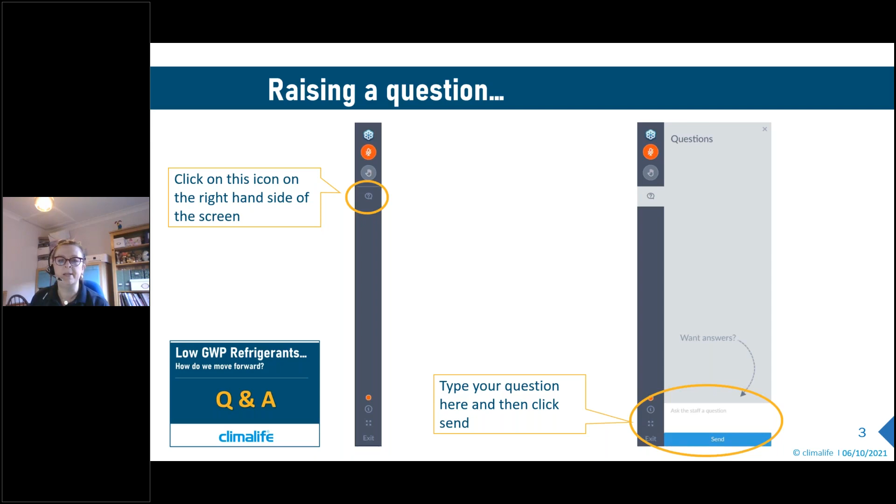So now it's time to hand you across to our Senior Technical Sales Manager, Neil Roberts. Good morning, Neil. Good morning, Mel. Thank you. Good morning, everyone. Well, Mel skipped over the agenda, so I'll just go back. Sorry, Neil. That's all right, no problem.

Okay, so it's great to have everyone on the call. It's great to see so many people interested. And as Mel said, we'll try and incorporate some of the questions which you gave us when you were registering. The agenda is pretty simple, just 3 points, but it's a huge subject area, and we're really only going to be scratching the surface this morning. So if there's anything else you want, you can watch it again on the recording, or you can contact us directly, of course.

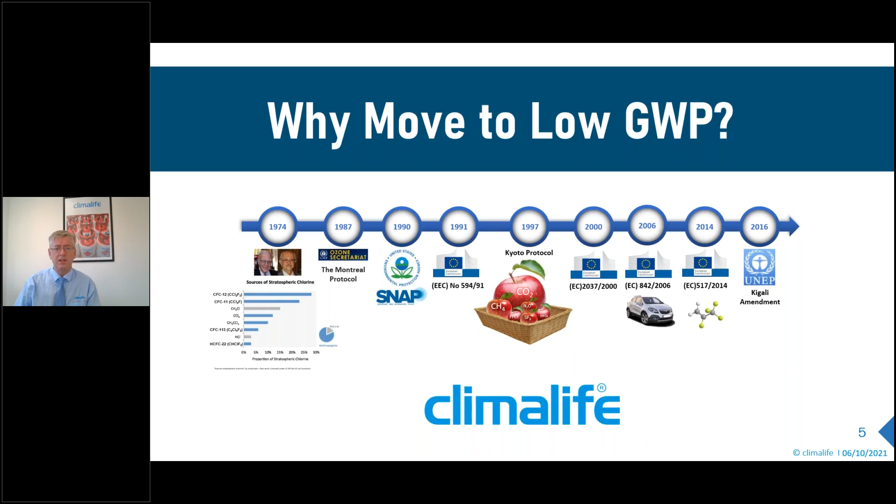And we have our first audience question, which was submitted during the registration. When is the 2,500 GWP limit going to be decreased for stationary systems and condensing units? And what will it be? Well, we'd all like to know that, quite honestly. Right now, the review process is going on in the UK and in Europe. And that process is indicating that there's going to be changes with things like this, but we don't know what they are yet. The EU have indicated that the first proposals will not be seen until the spring of next year, so we really have to wait until then. But I think it's a reasonable assumption to think that this is going to happen.

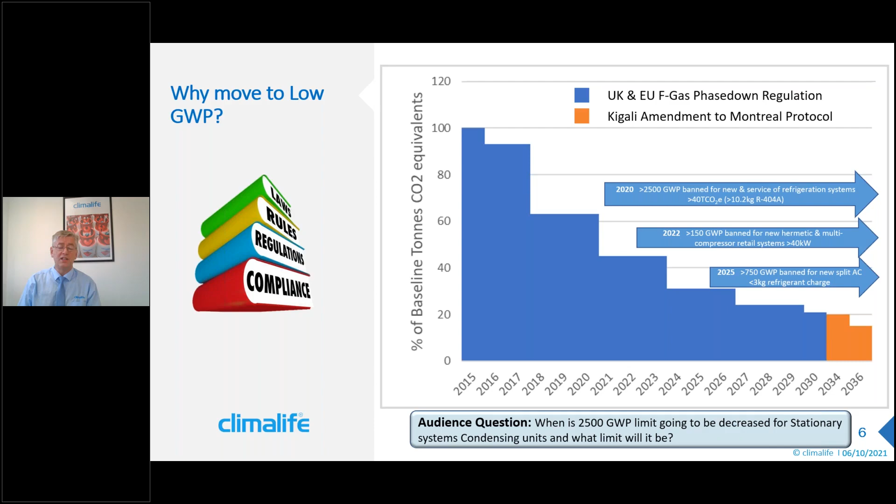So we're currently 2021, nearly into 2022, and we're around that 900. We should be around that 900 average. So anything significantly above that is obviously at risk at some point when the quota starts to bite.

And remembering this is an average. It doesn't have to be 300 or below, as long as the average, so we can use some higher GWP products, as long as there are other ones to offset it. But what can be said for sure is it's very unlikely anything with a high GWP will be sustainable in any large quantities going forward, because that would just take the average above there and we won't have enough quota.

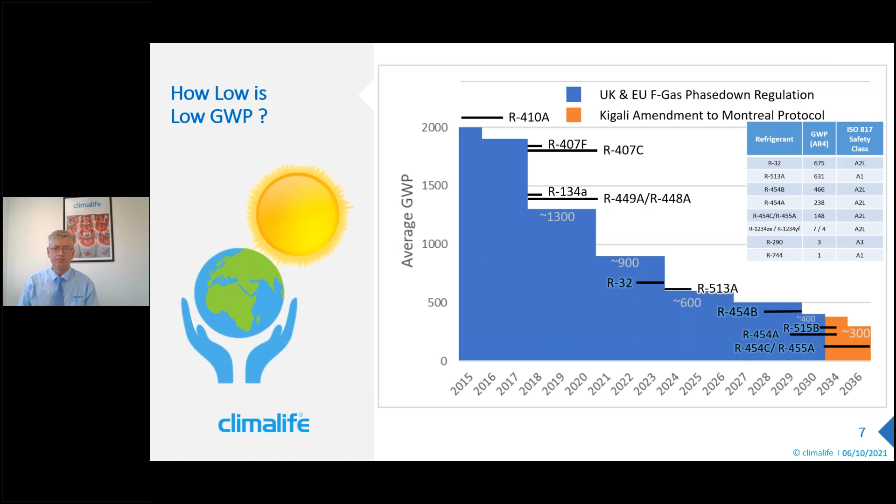So we have another audience question at this point. Are there any low GWP refrigerants which are non-flammable? Will A2L refrigerants become the trend for future refrigerants? Well, you can already see on the table there's carbon dioxide. That's a non-flammable low GWP refrigerant, but there are a few others. 515B, for example, is a non-flammable refrigerant. It's a 134A type refrigerant, and we'll talk about that a little bit later as well.

We've also got the low pressure refrigerants, 1336, 1233ZD, and maybe a few others which come along for very specialist niche applications. But these are really for low pressure systems. You may have seen just this morning on one of the media outlets, 1233ZD is being looked at for a high temperature heat pump system. So this is the type of thing where these products are going to be used. The mainstream refrigeration and air conditioning are going to be using the other products, which tend to be A2L.

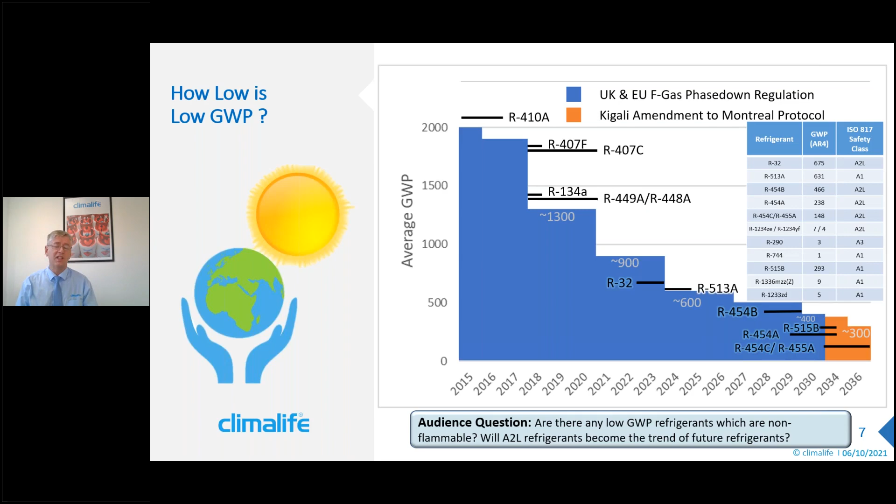And you might say, well, with the prices on this current trajectory, why should we bother to change? And the reason, of course, is the phase down. We're already probably not up to where we are with the phase down. I would challenge anyone out there using refrigerants to take stock of the refrigerants you use and work out what the average GWP of them is. If it's well above 900, you need to be looking at how you can change that, because at some point that quota will bite and we'll be back in that situation we were in 2017-18 with the higher GWP products.

Again, another audience question. With UK quota restrictions close to biting, why have many users seemingly stopped work on low GWP options? Well, one of the reasons is what you're looking at now. The prices have come down. It would appear on the face of it that there's maybe not a problem out there, but this is very much a false sense of security. And at some point, we will see that bite of the quota, and we will see the rise in price like we did in 2017 again.

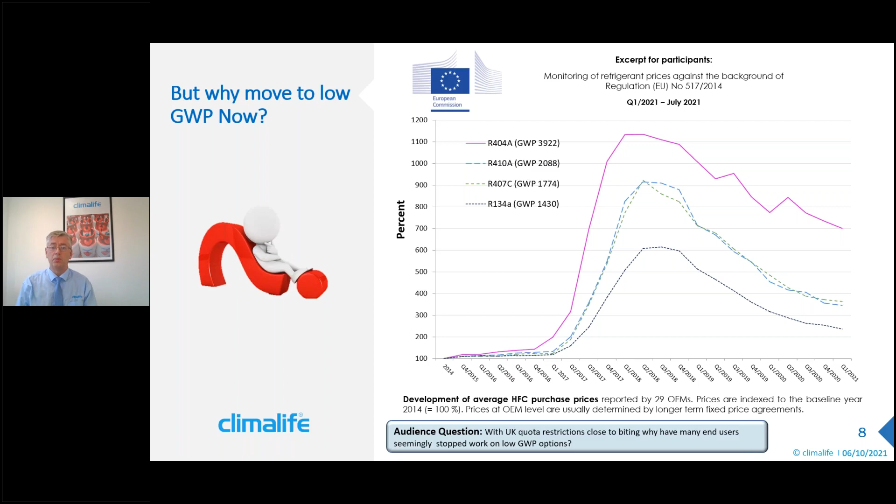So you can carry on using the products that you're using today, higher GWP products, but they're not sustainable going into the future. We had the perfect storm of COVID and Brexit as well happening in the UK. So all these things had an impact. So hopefully, very soon, that will now turn around and people will start to move again.

So that's all very well. We still haven't addressed why people should move to low GWP now. We've looked at the reasons why they haven't, but why should they? Well, I'm sure many of you played this game in the past, Top Trumps, certainly I did. So let's do a bit of refrigerant Top Trumps.

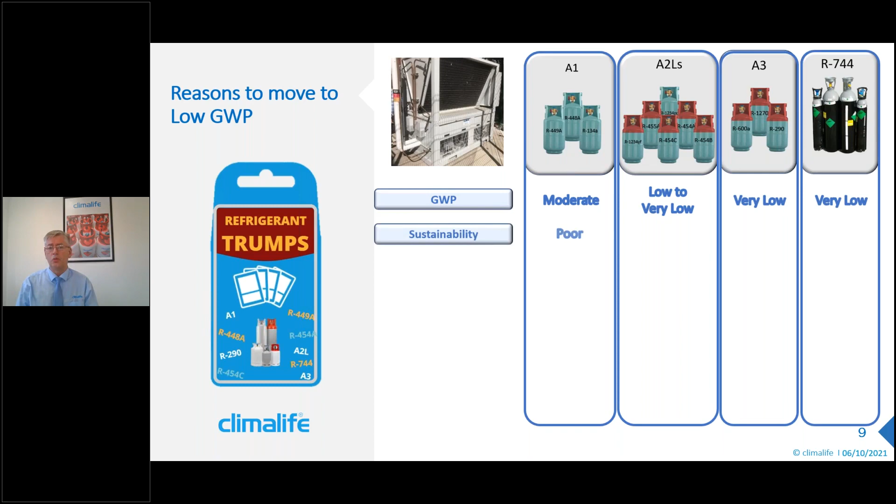Looking at the various parameters here, so global warming potential, obviously the replacements are low to very low. That's a necessity of the phase down. You need sustainability. If it's a higher GWP, if it's well above those average GWPs, then sustainability and price stability is going to be poor.

Energy efficiency is really important. Going forward, that translates into emissions, that translates into running costs, so it's really important to get good energy efficiency from your systems. And when we look across the line there, you can see I've put for A3s moderate. I'm not talking about individual systems. I'm talking about larger condensing unit systems where you probably need to use a secondary system, and that impacts on

energy efficiency. And CO2, that generally, fundamentally has a poor energy efficiency. You can do things to the design to improve the energy efficiency, but fundamentally, thermodynamically, it has a poor energy efficiency. Refrigerant charge is obviously an issue when we come to things like flammable refrigerants, and we'll cover that in more detail as we go through.

And total cost of ownership. A lot of the time, everyone is looking at the cost of installation, how much it's going to cost me to put this system in, and ignore the fact that that system may be cheap to put in, but it may cost you a lot of money over the lifetime of that system. So it's really important we try, as an industry, to look more at total cost of ownership rather than just cost of installation. It's a much better indicator of value for money.

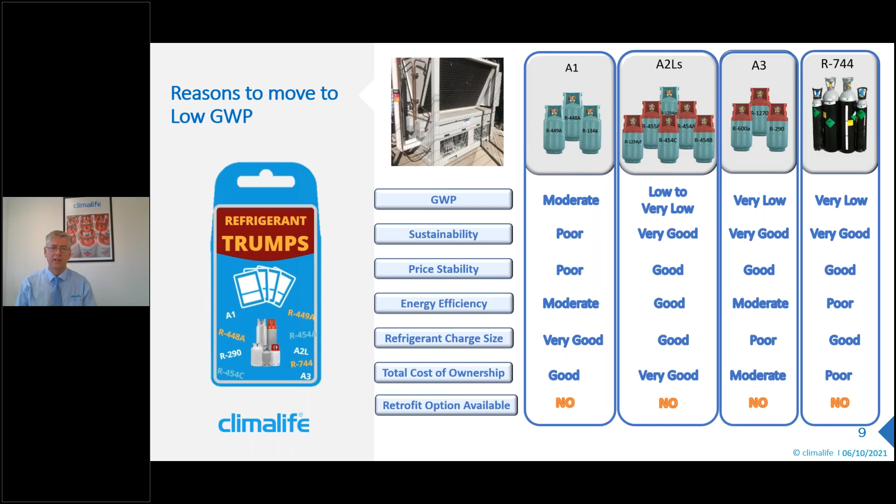Going forward, if you're putting in a 448A, 449A system today, and you want it to see through its lifetime, what are you going to do when the phase down bites, and it's either very expensive or very difficult to get hold of those products because there is no retrofit option? And this is really important. So any system you're putting in today, you want to see it through to its normal lifetime, then you need to put in a refrigerant which has sustainability and will take it through to the end of that lifetime. And that will not be current moderate GWP products.

So let's take a look at which products you might be able to use in which application. This is a very quick overview of where we are on this. So starting with self-contained or plug-in hermetic systems. And for the purpose of this, hermetic means all permanent joints in the system. So there are some standards and regulations applying to this. From an F-gas point of view, from the 1st of January next year, all refrigerants in new equipment will have to be less than 150 GWP in this type of equipment.

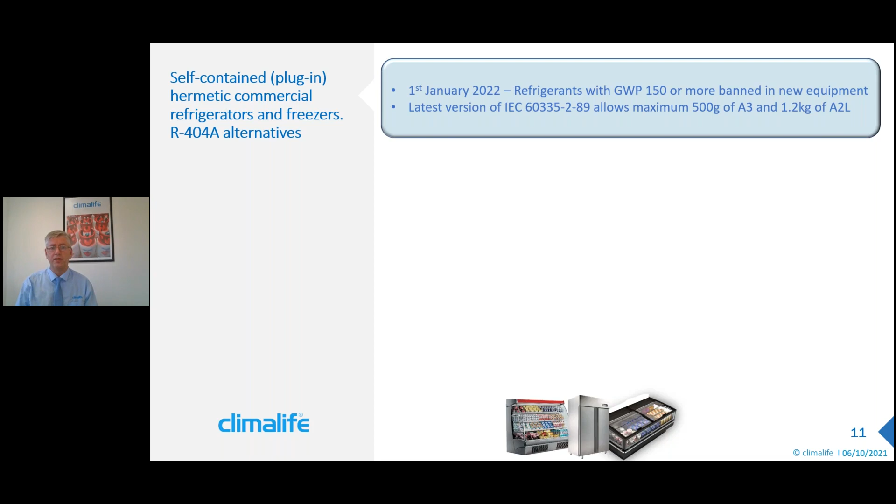And in terms of standards, the latest version of IEC 60335-2-89 allows a maximum of 500 grams of A3 refrigerant or 1.2 kilograms of A2L refrigerant. Now, it's difficult to compare these. They're going in lots of different types of equipment. So what I've done is taken some theoretical cycle calculations using the RefProp software, and you can see the conditions which have been used there to do the calculation.

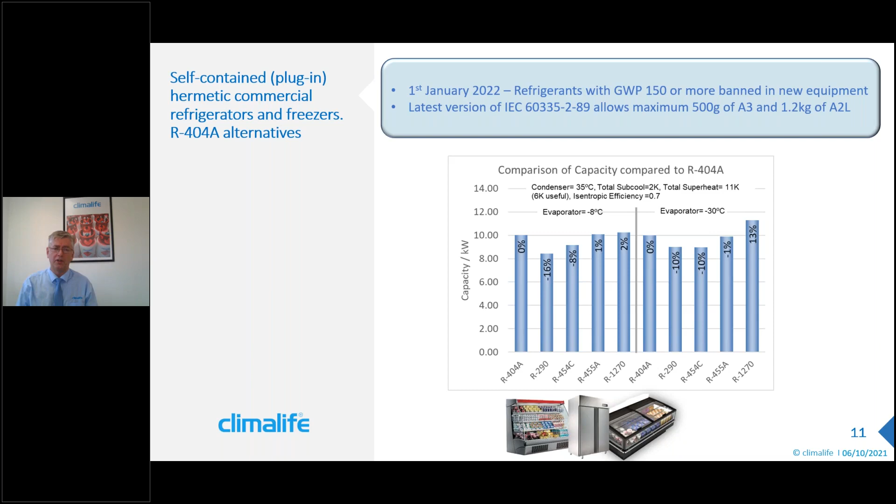Here's a capacity calculation, gives you an idea of the relative capacities. Because we're talking new equipment here, it doesn't really matter that it's a lower capacity refrigerant like propane, for example, compared to 404A, because you can use a bigger compressor. You can design for that capacity load. So the capacity difference is just there to show you how they compare to each other, but it's not going to be an issue, although there may be some limitations in this type of equipment. For example, space can be at a premium, so a much larger compressor could be an issue. But certainly for the examples given here, none of these would be a problem.

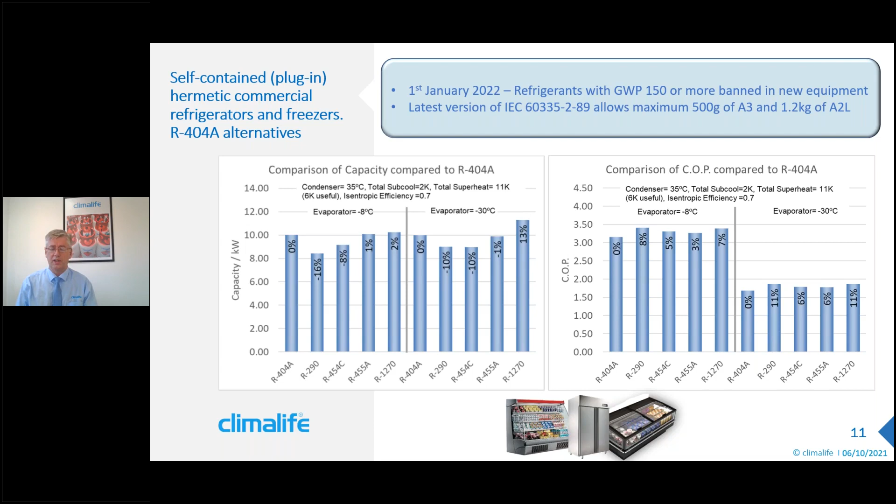But what's really important, as I said earlier, is energy efficiency. So when we look at the COP of these refrigerants, we can see they're all better than 404A, which is what may have been used in the past. And we can see here why, in many cases for this type of equipment, hydrocarbons are used, because they are showing the highest energy efficiency, both at medium and low temperature, whether it be propane or propylene. But the other low GWP options, 454C and 455A, both show energy efficiency gains over 404A as well. So they're both good options in any situations where the A3 flammable refrigerants may not be accepted.

So also, some of the systems may have used 134A in the past. For domestic applications, isobutane was used in these applications, but in many commercial applications, as you can see on the chart, it's a very low capacity compared to 134A, and the extra size in the compressor is going to be difficult. As I said, size is often a premium in this type of application.

We can also see that there are other A2Ls. We have 1234ZE. That has a lower capacity than 134A, but as I said, in new equipment you can use a larger compressor, and that is also a possibility. But many of these systems, again, have gone to propane in medium temperature and low temperature.

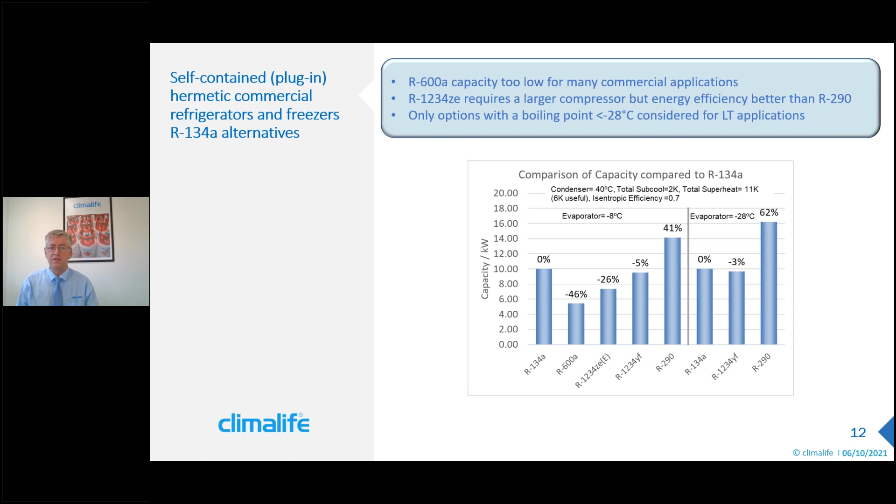When we look at the COPs, the energy efficiency, maybe a surprise to some people, we'll see isobutane certainly had a higher energy efficiency than 134A, but as we already said, it's not really used in commercial equipment because of the much lower capacity. But 1234ZE actually has an equivalent energy efficiency to 134A, and actually better than propane.

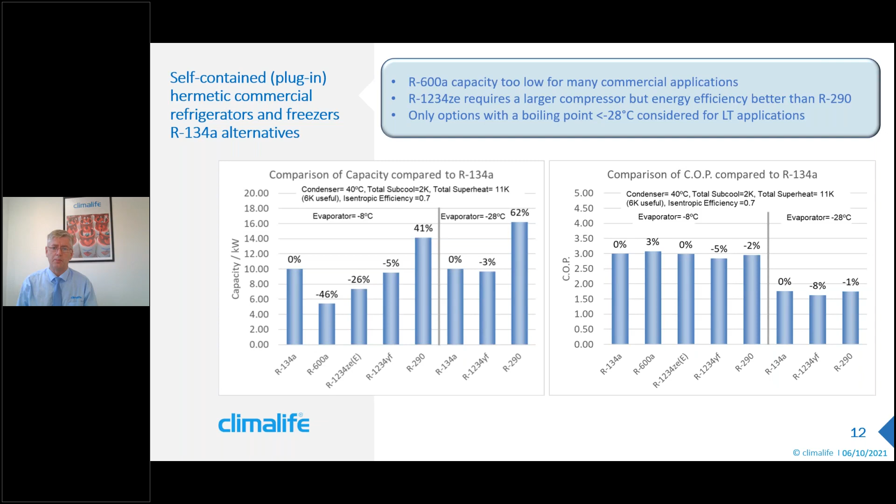So 1234ZE may be an option for medium temperature. It's not really an option for low temperature. The boiling point means we'll be going into a vacuum to operate in low temperature applications. So for that, certainly propane is looking like a good option.

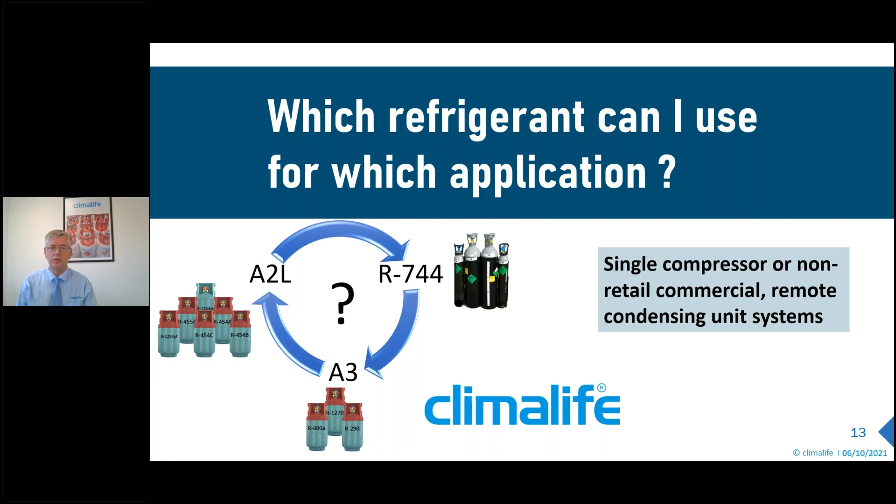So moving on to single compressor non-retail commercial, and I emphasize non-retail because there are different rules for retail, which we'll get onto very shortly. Standards and regulations. F-gas again, of course. As far as this application is concerned, at the moment it's just a 2,500 limit, and that's been in place since January 2020.

We also have EN378 coming into play with this type of equipment, so charge restrictions will apply depending on the safety class and many other aspects, and we'll look into that in a moment. And also we have the pressure equipment regulation, PED, which again has to be taken into account, but PED applies to all refrigeration systems. It has done since 2015, but with the flammable element, there may be some more rigorous checks or certifications or even engineer qualifications which are required.

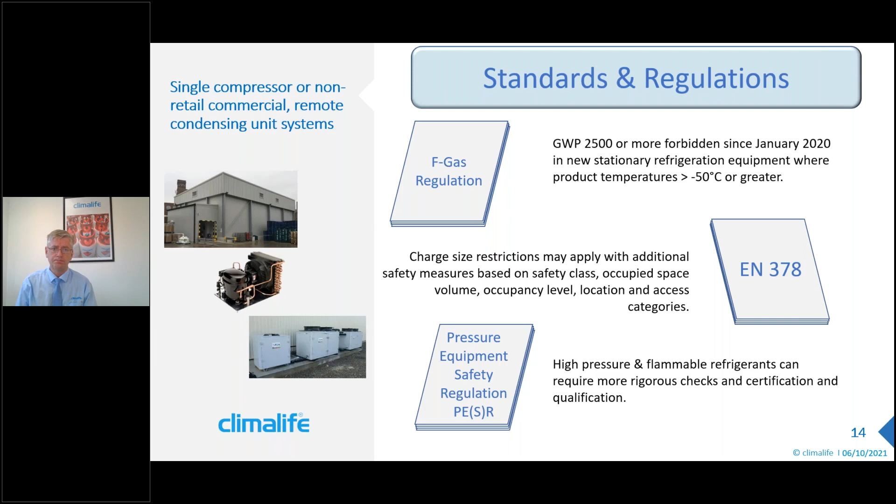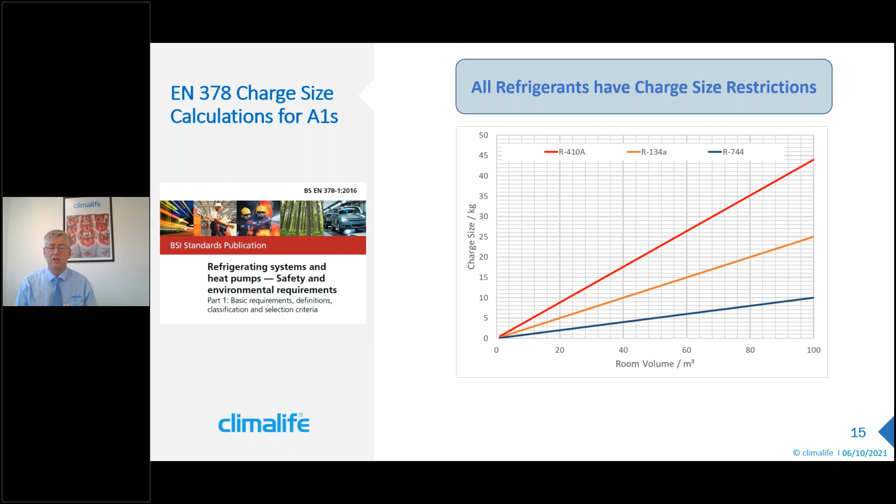So EN378, as I said, applies to all refrigerants, not just A2Ls or any flammables. And some people may be surprised to learn, it's quite often overlooked, that all refrigerants do have charge size restrictions. You can see here on this chart, we have 3 A1 refrigerants, 410A, 134A, and carbon dioxide. And you can see there's quite a big range already in the charge size restrictions allowed under EN378. So it doesn't just apply to A2Ls, it's just with the flammability, quite often the charge restrictions are a little more severe in some cases.

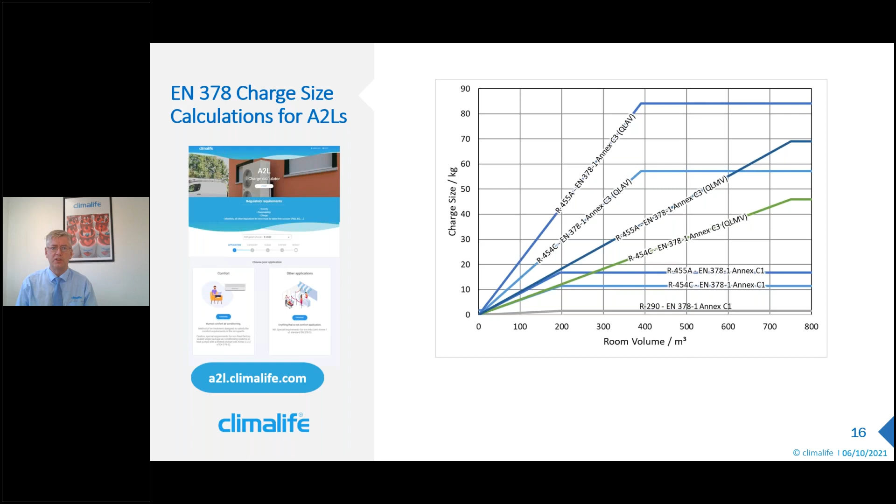But then for systems where the refrigeration system is outside, so a typical condensing unit, you can go up to much higher levels, and with some additional protective measures, depending on the refrigerant, you can go right up to 84 kilograms of refrigerant as well. So there's a big range of potential charge sizes which can be used depending on the conditions. And I'm not going to go into the details of EN378 today. If anyone wants to do that, you can by all means contact me at a later date.

Another audience question. What safety measures are required for a small store with a refrigeration load of approximately 15 kilowatts with a floor area of 160 square meters? Well, first thing I would say is EN378 for refrigeration works on room volume. So the floor area and the amount of refrigerant allowed will depend on the ceiling height. I've got 2 examples here. I've got on the chart a 3-meter ceiling and a 4-meter ceiling. Where that line crosses the various lines for the different refrigerants, that will be the maximum charge quantity which can be used.

And you can see in the top case, with 455A you can use 84 kilograms, so that's the maximum you'd be able to use there, and around 57 kilograms with 454C, which would easily cover a 15 kilowatt system of this size. It would be well below those levels. In fact, probably well below the QLAV levels on there.

I've put carbon dioxide on there as well, because although it's an A1, as I said earlier, there are still charge size restrictions, so they have to be taken into account even with carbon dioxide.

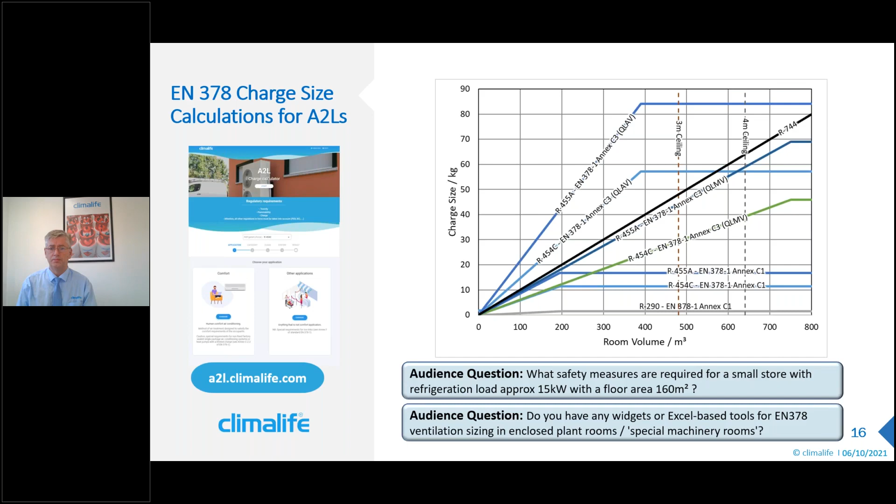Another question: do we have any widgets or Excel-based tools for EN378 ventilation sizing in enclosed plant rooms, special machinery rooms? Unfortunately, we don't have ventilation calculations. We do have, as you can see on the left-hand side of the chart, a web-based EN378 charge size calculator. We call it an A2L charge size calculator, but all the refrigerants are in there, basically all the A1s. You can do the charge size calculations for just about any refrigerant using that. If you need any help on that, by all means contact us and we can help you. Maybe the ventilation one is something we should look at in the future.

The next thing to take into consideration when moving from an A1 to an A2L or A3 refrigerant is, of course, the Pressure Equipment Regulation. Under this, the A1 refrigerants have been in fluid group 2, but the A2Ls, with the exception of 1234ze, and the A3s are all in fluid group 1. And this has quite a big effect in terms of which category the system may fall into, and it will change categories at much lower volume. The table there is for a vessel on the high pressure side. You can see where it changes.

If we take an example, a system with a 10-liter liquid receiver on the high pressure side with 404A or 449A, that would be category 2. But with 454A, 454C, 455A, and carbon dioxide, that would move up to category 3. With 1234yf, if you went to a lower pressure A2L, then that would remain at category 2. And if you used 1234ze or 515B, then that would actually go down to category 1 because of the lower pressure, and also they're considered group 2 refrigerants under PED.

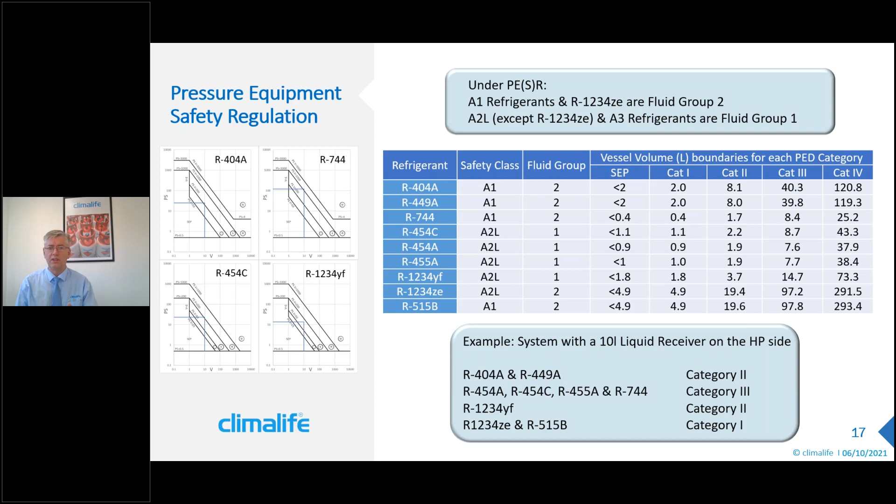So you can see there's a big difference there, and this is one of the main reasons why you won't be able to use an A2L in an A1 system as a retrofit option, because making this change of category on a system in place is going to be very, very difficult to say the least.

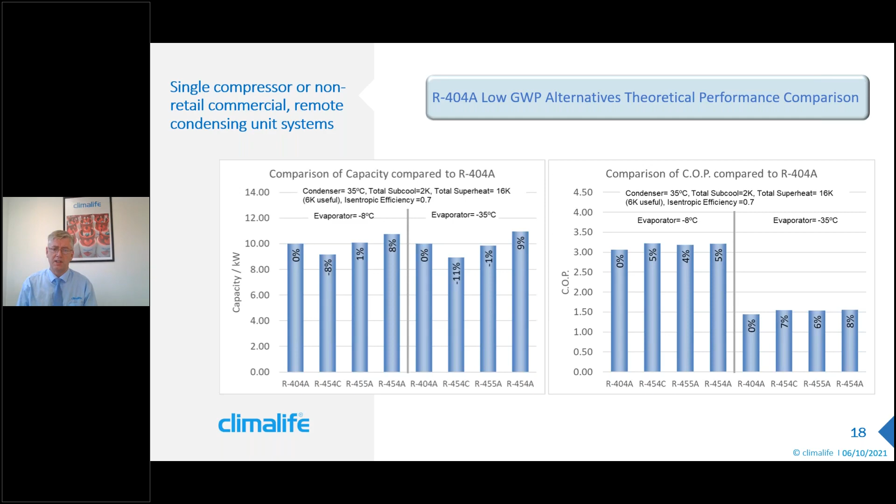To compare it with carbon dioxide, it's quite a tricky one because obviously the technology is quite different, the systems are quite different. But what I've done is, again, some theoretical calculations based on a simple carbon dioxide booster system with 4 kilowatts low temperature and 10 kilowatts medium temperature, comparing that to two individual systems with an A2L refrigerant at medium temperature and low temperature.

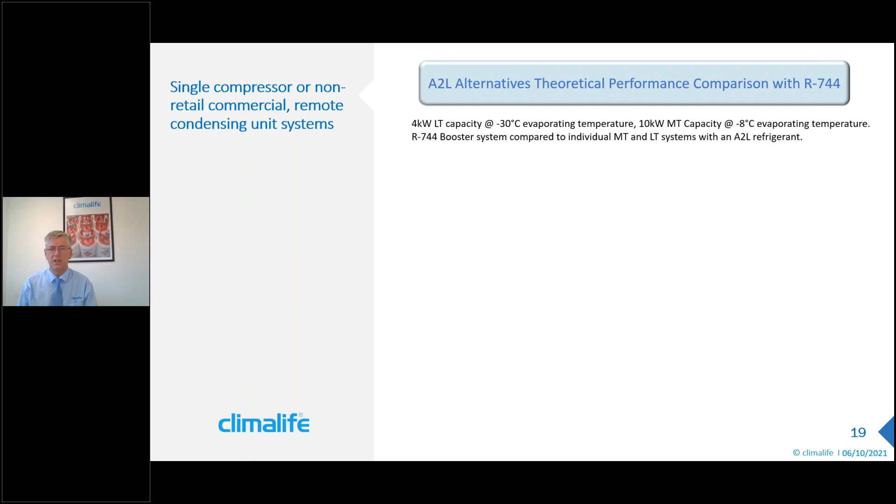At the design condition, you can see there's a very significant difference in the COP, the energy efficiency. And this is even using the same compressor isentropic efficiencies for both the carbon dioxide and the A2Ls, which is not normally the case. Normally, you would see a drop-off in isentropic efficiency in the CO2 system, but I've applied the same to both. So that's the design condition.

If we look at a more typical operating condition, especially for the UK, 15 degrees ambient, then we can see, although the carbon dioxide system COP has gone up, the other refrigerants have gone up as well to a greater extent.

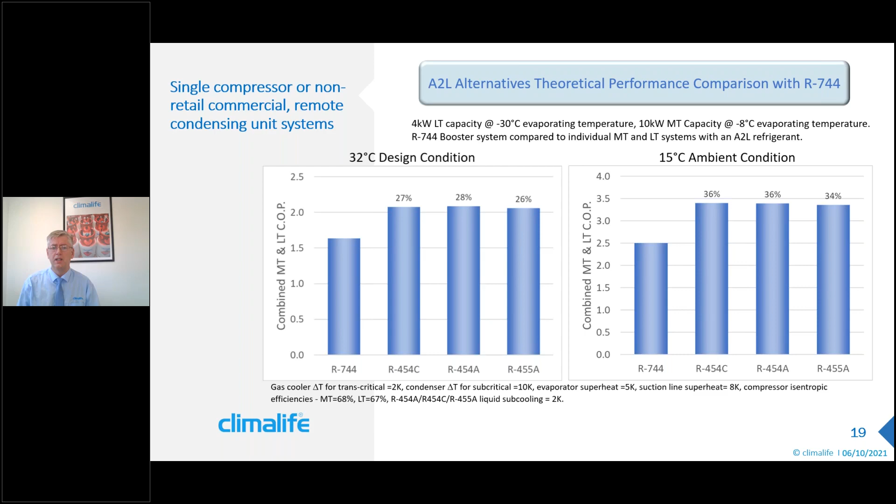So we're actually seeing that gap widen between them. So you can see in any situation where you're looking at a low GWP option, you need to evaluate what refrigerants you can use, how they perform, and how this obviously translates into energy efficiency, which, as I said earlier, translates into emissions, but it also translates into running costs as well. So it's really important to do these to make sure you don't just base any decisions on refrigerant GWP.

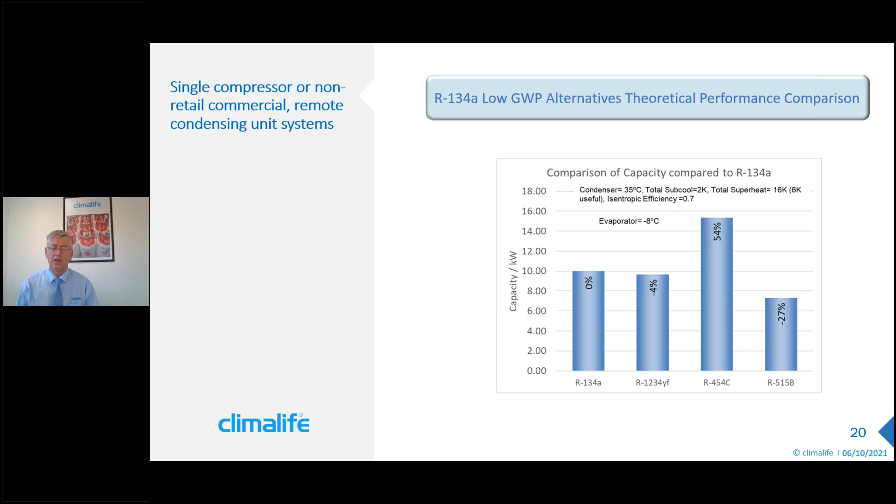There may be some people out there using 134A type condensing systems. In this case, we have some other options. 1234YF is an option. 1234ZE is also an option, but I've included 515B, which has a very, very similar performance to ZE, but it's A1 classified. So although you would need a larger compressor to get the capacity at medium temp conditions, you have got the A1 possibility with that.

And we look at the energy efficiencies, and you can see that they're all very close, the 1234YF, and I put 454C in there. That may be an option. It's got a much higher capacity, obviously, but it may be an option worth considering, although the efficiency is slightly lower than 134A, whereas the 515B has an equivalent efficiency to 134A.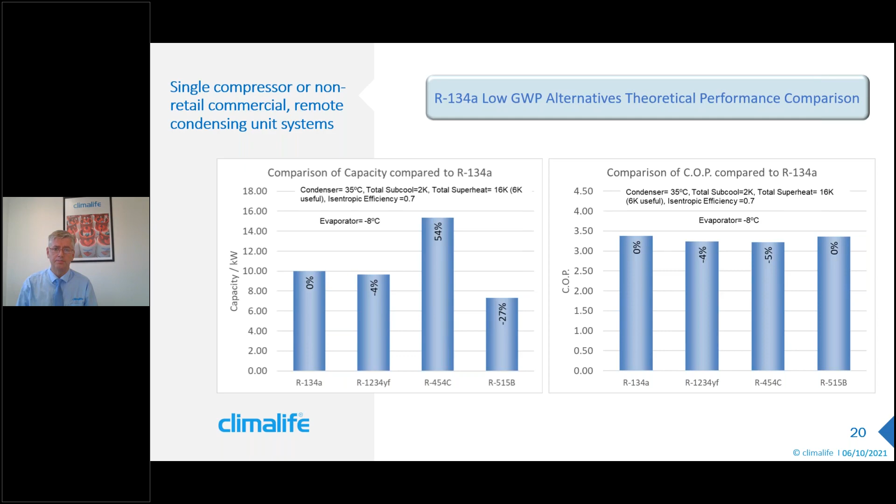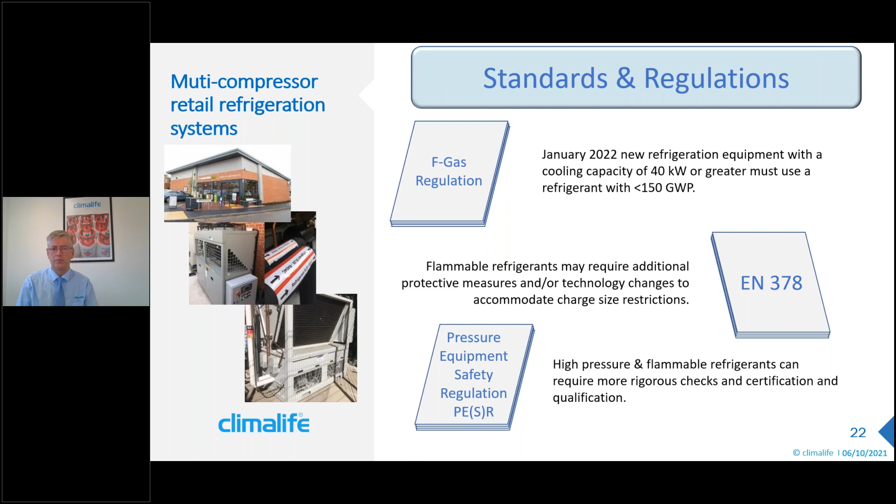Multi-compressor retail refrigeration systems. So under the F-gas, as of January the 1st next year, so just a couple of months away now, new refrigeration equipment with a cooling capacity of 40 kilowatts or greater must use a refrigerant with a GWP less than 150. So this is going to be a big change for that application, obviously. The EN378, as with the condensing units, also applies, and of course pressure equipment regulation also applies in this application as well.

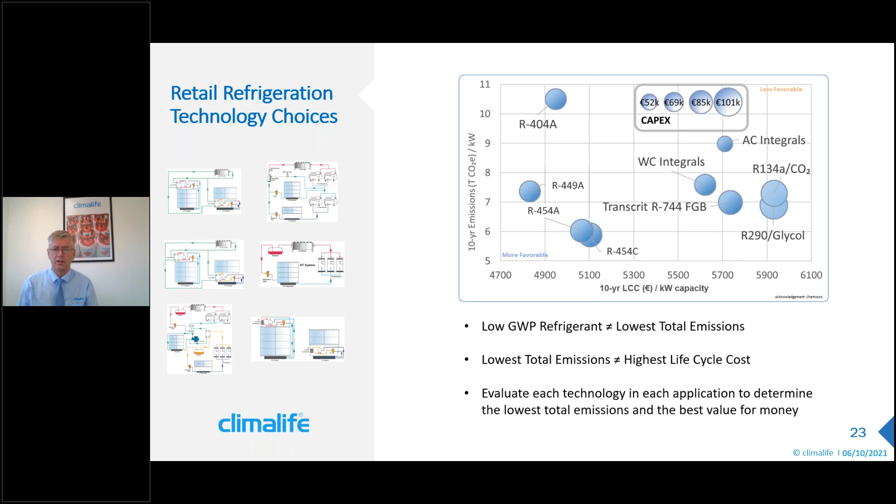So the main message from this is low GWP refrigerant does not necessarily equal the lowest total emissions. And lowest total emissions are not necessarily going to be the highest life cycle costs. You can get low emissions and low life cycle costs as an option. And it's really important to evaluate each application to determine the lowest total emissions and best value for money that technology is going to give you. This is a case for particular supermarkets, but in other applications, this may not be the case, and maybe the other technologies are better for those applications.

Rather than go through theoretical cycle calculations, which would look almost the same as we just looked at for the condensing units, I thought we'd give some case studies which have been published already. This one, Central England Co-op, Langley Park in Derbyshire in the UK. This was installed back in September 2019, so it's been running for 2 years.

As you can see from the information there, it's running extremely well and showing energy savings over similar stores which were installed before that, leading Kevin Collins, the head of facilities there, to state that 454C meets all the criteria, and it will be rolled out in the future stores. And I believe that's exactly what's been happening since then.

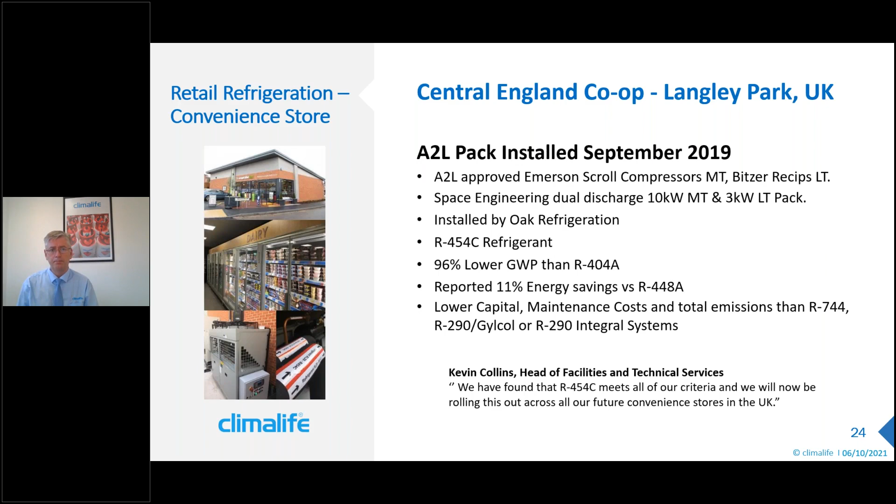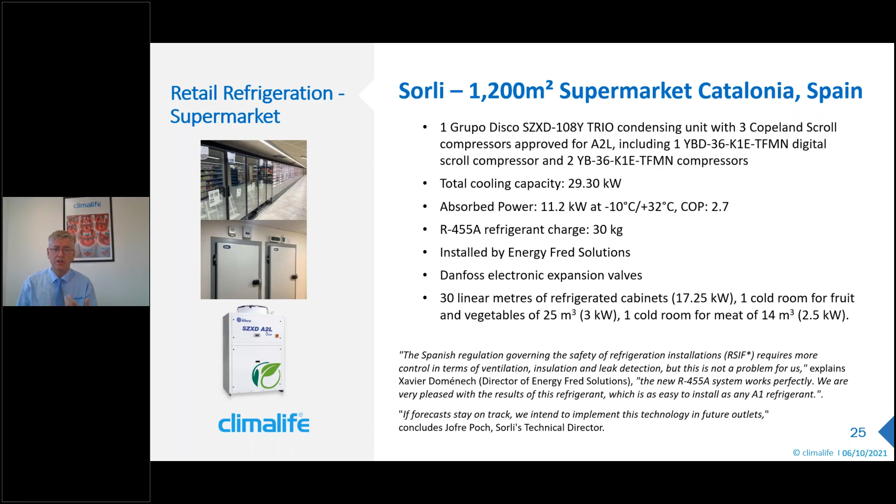This example, slightly bigger supermarket. This one's in Spain, Catalonia, with 455A. You can see the details of the system there. And again, the comments back from the installation engineers were that the system was very similar; there were some additional safety measures which they had to take, leak detection and such like. But overall, it was very similar to installing an A1 refrigerant system. And the end user also was very happy with the way it was working and was looking to roll this out as a future option for their stores as well.

Final example, you may have seen this, it's been well publicized over the last couple of years at Asda. With Asda, they chose to go the 454A route. If you remember back at the beginning, 454A actually gives a higher capacity than 448A, so they're getting a bit more bang for their buck, if you like. But because 454A is above 150 GWP, so 238, their systems are less than 40 kilowatts.

So Asda had already moved to a modular system years before this, and this now put them in a great position that they can easily change to the A2L 454A in this system. And they've shown energy savings, and from their own internal studies, they've concluded lower capital and maintenance costs than CO2 systems. And all new Asda stores, all new installations are now either A2L ready or will be installed on an A2L. And from next year on, will be on A2Ls.

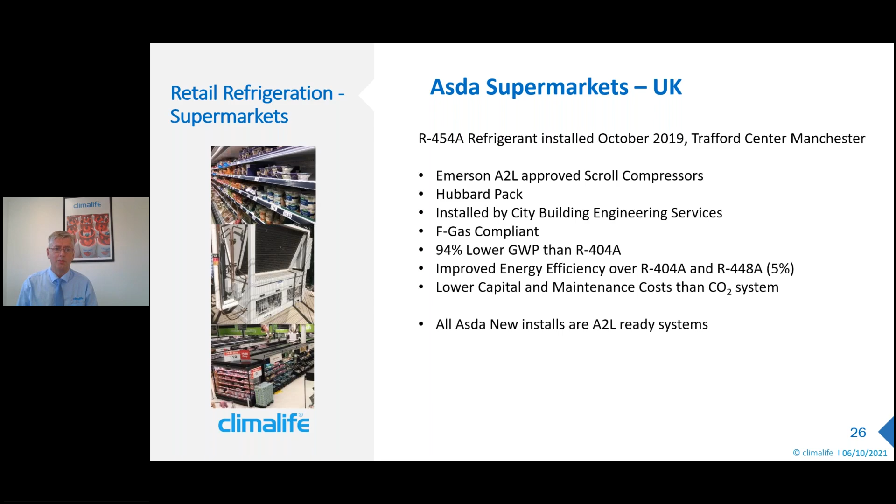Finally, industrial refrigeration. We have an extra candidate in industrial refrigeration. Of course, ammonia is widely used already in industrial refrigeration and is the lowest GWP. It's the only refrigerant with a GWP of 0. So that is definitely in the mix. But also, because of the wide range of applications and situations in industrial refrigeration, almost all the refrigerants can be used. So ammonia is widely used, especially in larger systems. Where ammonia cannot be used in larger systems, you're seeing carbon dioxide taking up some position in that situation.

So basically what you have to do, and this goes for all the applications, is check: is it sustainable? What's the energy efficiency? Look at system complexity, total life cycle costs, total emissions, ease of maintenance, reliability, safety. Evaluate all of these and see which makes the most sense for your application. And industrial refrigeration, like I said, because of the very wide range of different applications, you'll have to do this to decide what is the best option going forward.

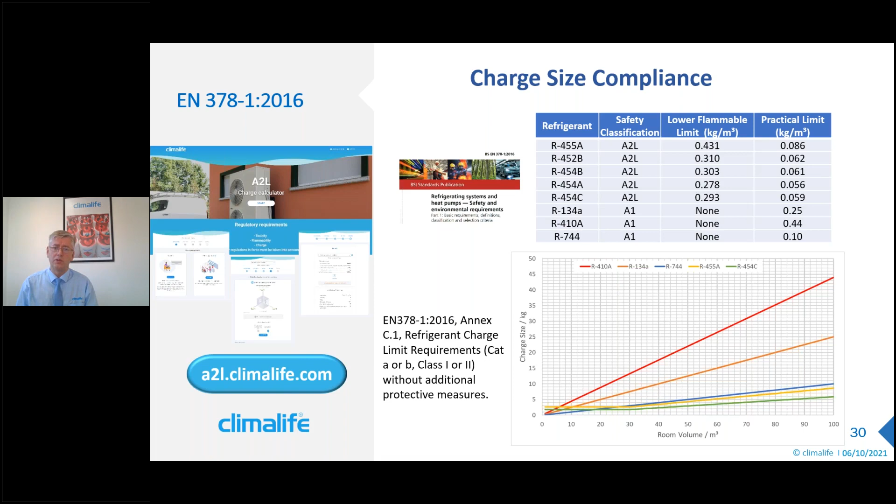So what do I need to do to use A2Ls? Well, we've covered a lot of what you actually need to do with the A2Ls. I'm not going to go into huge detail here because we don't have a great deal of time. We could spend the whole 45 minutes just on this subject alone. But just to skim over it again, EN378. EN378 covers many aspects of system safety. It's not just charge size. But when we come to flammability, charge size definitely becomes an important factor, and there is guidance within the standard to help you design systems and use charge sizes which will prevent flammable atmospheres from occurring.

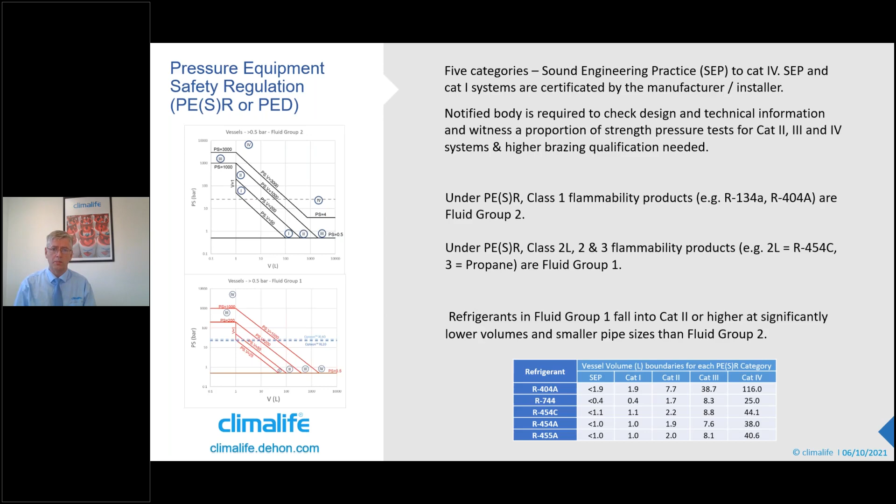Pressure equipment regulation, we've covered that as well. It's really important that you comply with this. It is the law. It's a regulation. We have to comply with it. And if you're looking at existing equipment, please be very aware of the limitations you're going to face under pressure equipment regulation. This is why A2Ls and A3s are really new equipment refrigerants, not retrofit options.

If you comply with EN378 and you comply with the pressure equipment regulation, that doesn't remove the need for you to still do a risk assessment. They form part of the risk assessment. All air conditioning, refrigeration, heat pump systems require a risk assessment. And as I've already mentioned, since 2015, DSEAR, the Dangerous Substances and Explosive Atmospheres Regulations, applies to all gases under pressure, which is pretty much all refrigeration systems.

If you comply with EN378 and you prevent flammable atmospheres from occurring, that makes things easier under DSEAR. But if you cannot prevent a flammable atmosphere from occurring, then risk assessments must be performed, as guided through the DSEAR regulation and using the principles of EN 60079.

There is quite a lot of guidance available. The Institute of Refrigeration has published a number of documents to help guide you on what needs to be done. And in the very near future, there will be a feature document published as well, helping on applying EN378 and the pressure equipment regulation to A2Ls. So keep an eye out for that in the press.

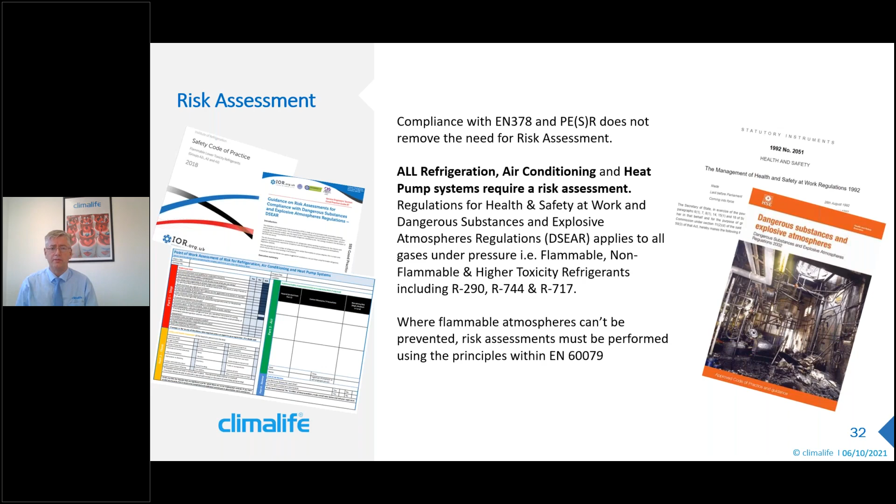So in summary, legislation is driving the industry to low GWP refrigerants. Stay ahead of the curve. Don't wait until the next quota crunch bites. Don't wait for that 2017 situation to happen again before you do something, because you will find yourself in a lot of difficulty. Do it before, even if it appears you don't need to.

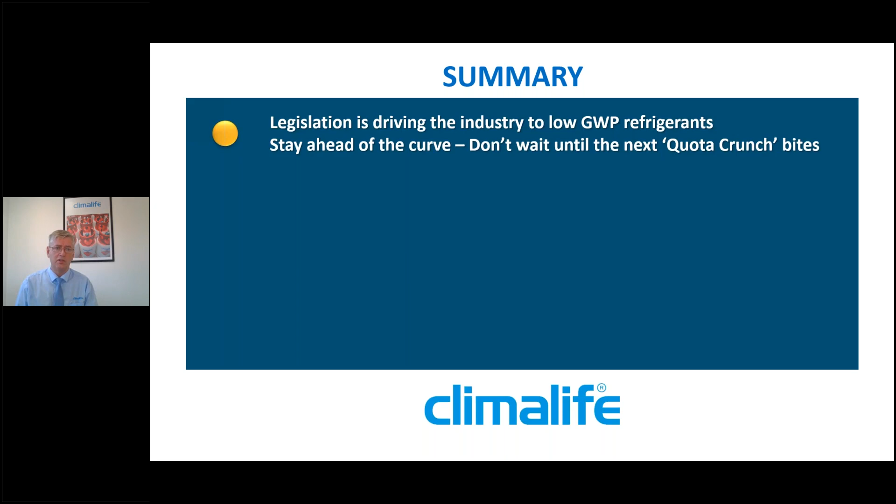A wide range of low GWP refrigerants are already available, and equipment, not an absolute full range, but a very wide range of equipment is now available for use with these refrigerants. There are no easy retrofits to low GWP options. If you install an A1 high or moderate GWP refrigerant today, that is the refrigerant you're going to have to keep using to the end of the life of that equipment.

Lowest GWP does not necessarily equal lowest total emissions. Do your homework. Evaluate the system. We can help you with that. Talk to us, and we can help you to do that and make the decision based on all the information, not just based on the GWP of the refrigerant.

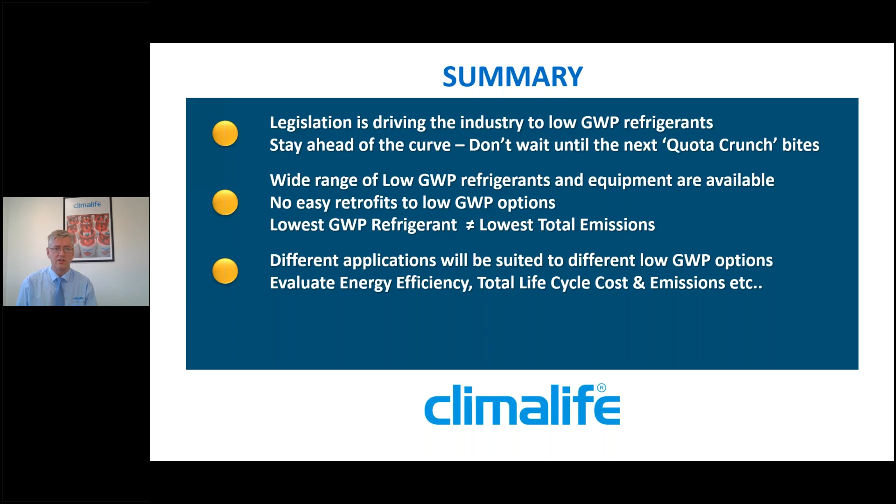Different applications will be suited to different low GWP options. There's no two ways about that. A2L is not the answer to everything. CO2 is not the answer to everything. Hydrocarbon is not the answer to everything. So you need to evaluate energy efficiency, total life cycle costs, emissions, and all these things to really determine what might be the best option for you going forward.

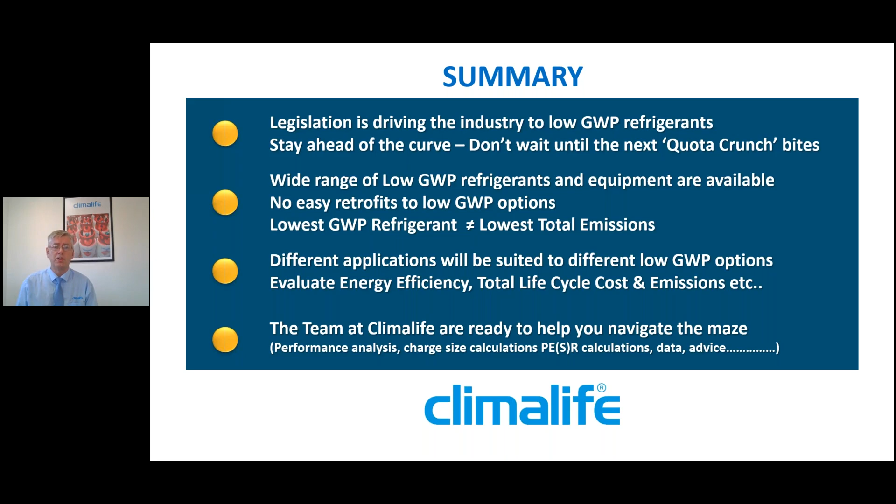Thanks, Neil. And I think that's me. I'll hand you back to Mel. Okay. So now it's time to take some questions from the audience. Let's have a look. So first question, in fact, there's two questions kind of linked.

So what is the timeline for 410A conversion? And the other question is replacement for 410A and the future of VRF regarding required kilogram tons of refrigerant. So over to you. Right. I haven't mentioned air conditioning in this. I apologize to anyone who tuned in to hear about air conditioning. The main reason for that is this is pretty much led by the manufacturers. The manufacturers decide what refrigerant's going in there, and they supply the equipment. Obviously, R32 is taking over a lot of our 410A equipment.

In terms of the replacement 410A future VRF, there's a lot of work going on in that. You need to keep up to date with the manufacturers. In terms of retrofitting, there is a product which is available, which is being tested at the moment, and I would call it in the moderate GWP range. There is nothing in the low to very low GWP range which can be used to replace 410A. But where possible, try to avoid it, and if you can't avoid it, just be aware that there may be some constraints later in the lifetime of that equipment. All right, lovely, great, thanks.